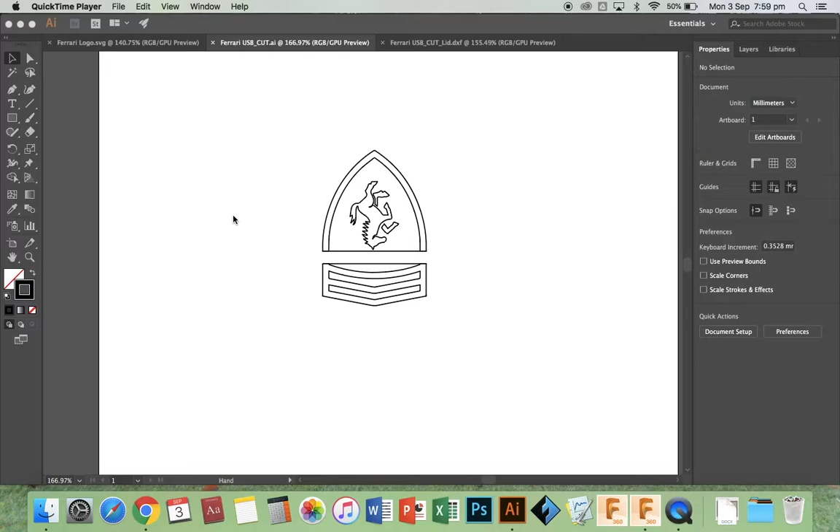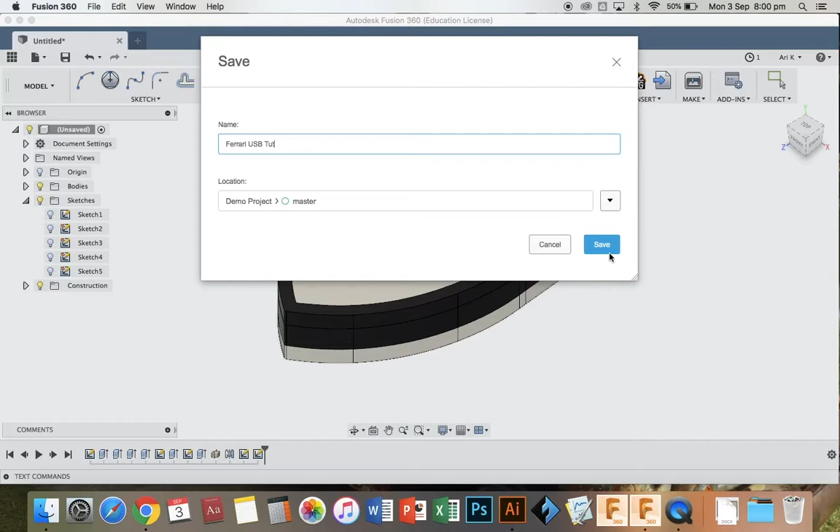So now that we've set up the laser cut files, we'll go back to Fusion 360, back to the Ferrari USB, and it would probably be a good idea to save by this point. We should actually save along the way. So do that. We'll just call this Ferrari USB Tut. You can call it whatever you want, but that's what we'll call it for this part, and that will save it to the demo projects, which you can access again later. So press save.

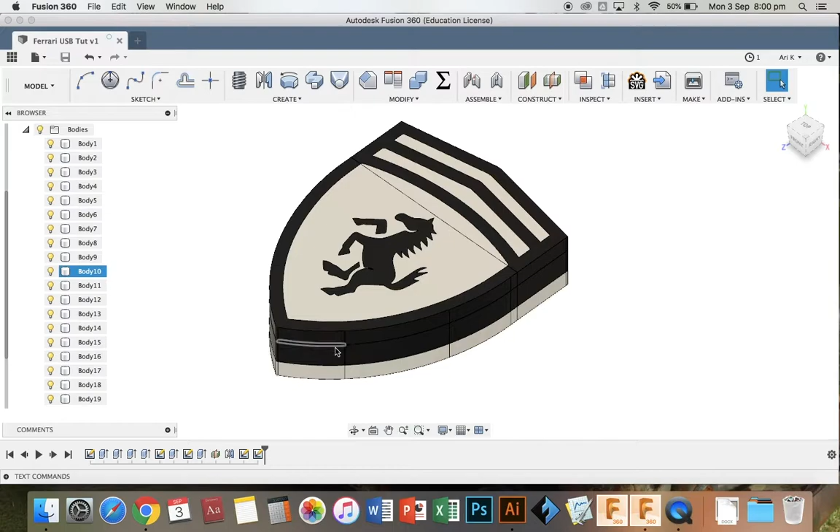Alright, so now that that's saved, we can tell because it has a name up the top here. What we want to do now is 3D print the files. So we'll go to bodies, and this is a bit hard because they all look the same. But we know it's the central body, so we can go select, and it'll actually underline which body it is. So then we can select body 10, which it is. We can see by the blue outline.

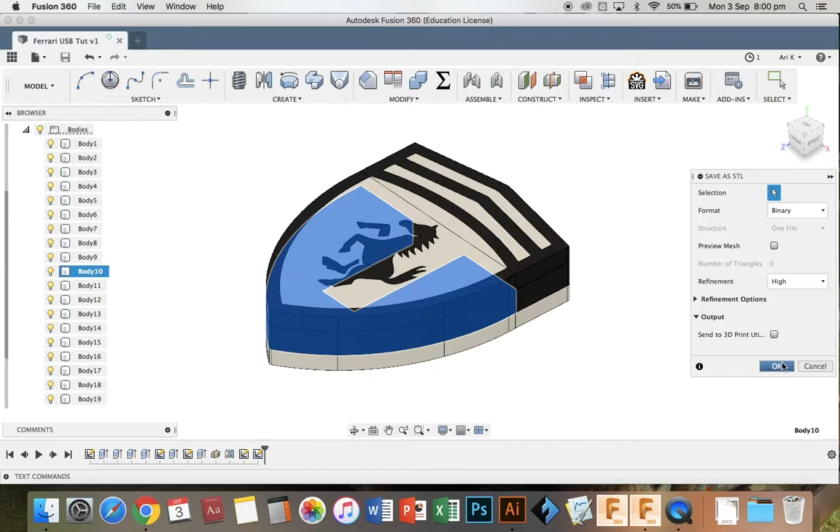And then we can go 2-finger right click. We'll save it as an STL. And we'll change the refinement to high. There's multiple settings; we'll make sure it's high. And we'll just go OK. And we'll save this as Ferrari USB underscore body underscore print. So now we just know that we can print that one. So we'll save it to our Ferrari USB folder again and press save.

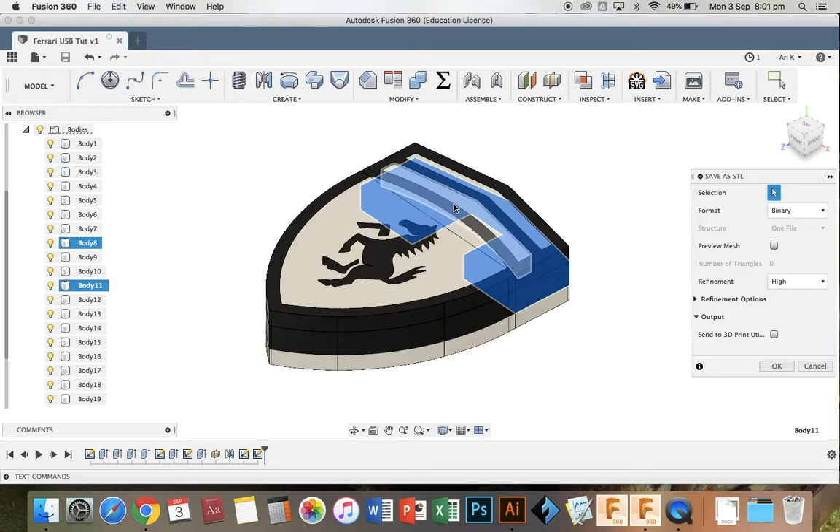And we'll do the same thing for the lid, so we know it's the central part, and that happens to be the body underneath it. So we can click that, 2-finger right click, save as STL, refinement high, OK, Ferrari USB underscore lid underscore print. And we'll just save that again in the Ferrari USB folder.

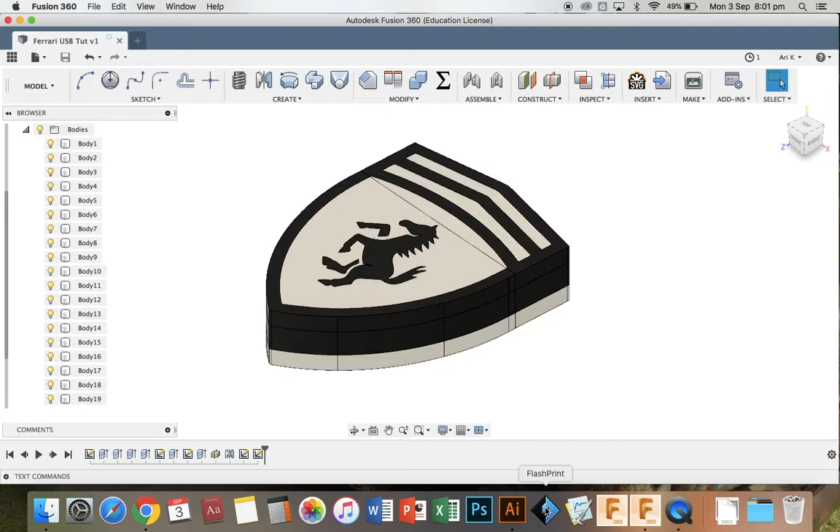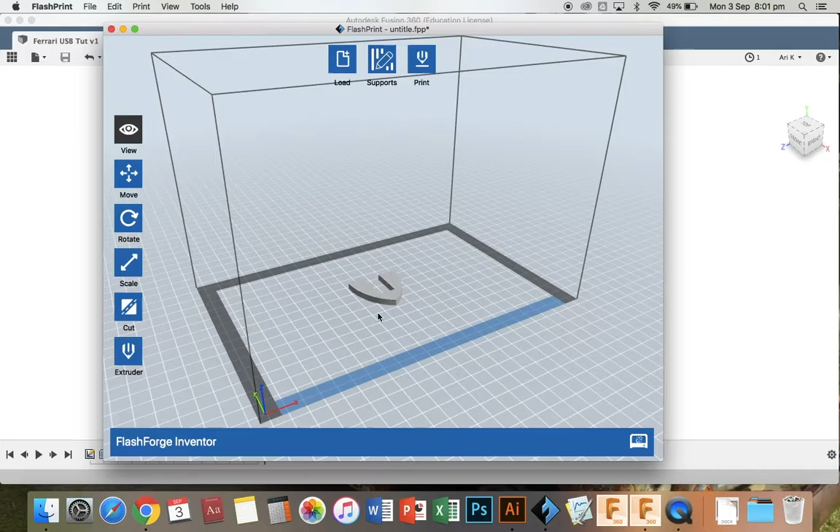Alright, so once we've done that, we can then open FlashPrint. This is the printing slicer for the FlashForge Inventors. That's in the bottom. So then we can go load and then STL files. So we'll go Ferrari USB body. We'll open that. So that will import it, and it'll be on the bed. And then we want to print the lid as well. So we'll load lid, open.

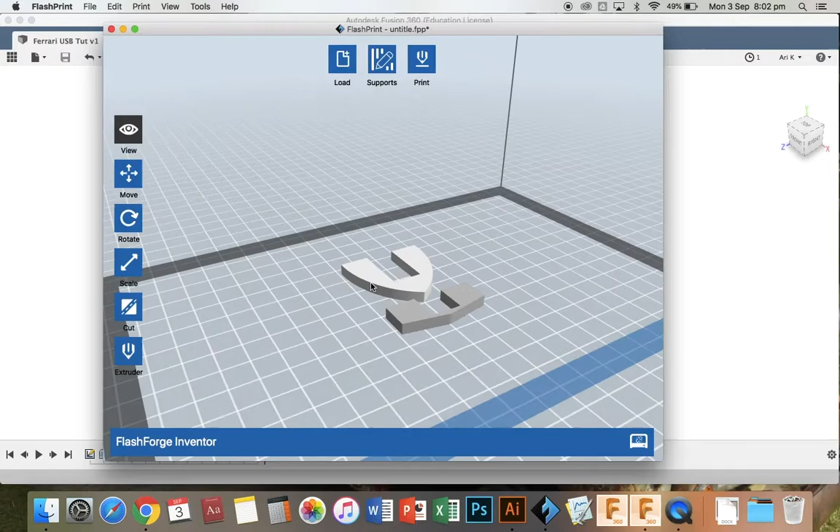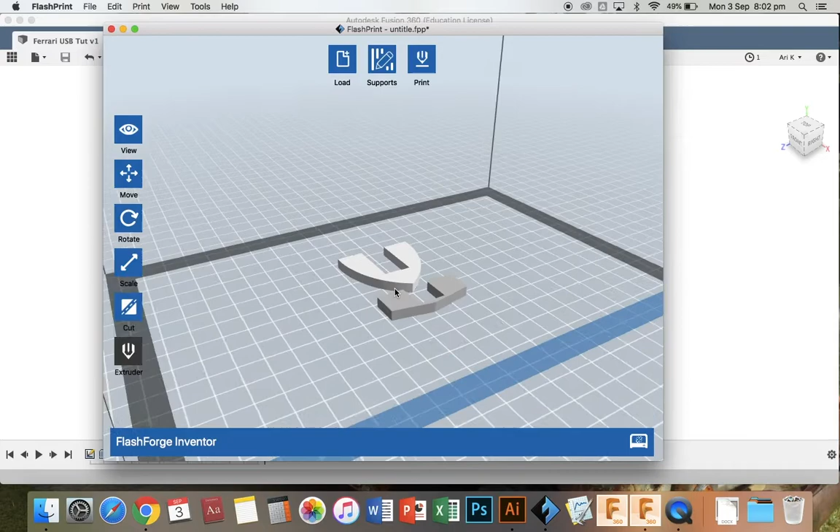See how they're kind of colliding and we have to move them. The printer won't like that. So if we go up the top and we go edit, auto layout, it will automatically arrange the prints so the printer can print them nicely. Depending on which color you want, the Inventors actually have 2 extruders. So you can change the extruder heads by double right clicking on this tab and then selecting your bodies. We'll leave it at the right extruder for now. There's no need for supports on this as there's no overhangs. So now we can go straight to print.

These are some custom settings, but we'll change the quality to high, which just gives it a pretty good finish. And we'll actually put a raft on this just to make sure that the quality of the print on the first few layers is good. So we'll enable raft, change the extruder to right, so we only print with the one color filament, and we'll change the space to model Z parameter from 0.25 to 0.4, which is what I have. So we'll go 0.4, and I accidentally pressed enter, so just cancel that.

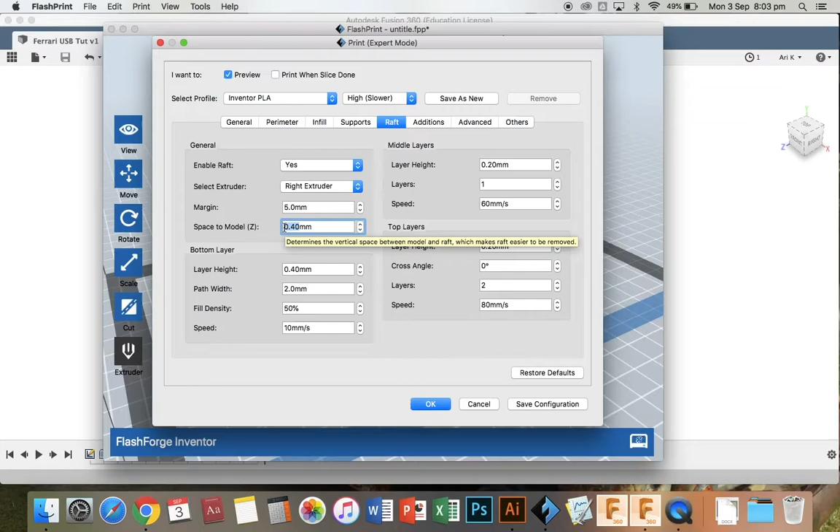What this does is it just lifts the print off the raft, which makes it easier to remove, if you read the little heading when you hover over it. Determines the vertical space between the model and the raft, which makes the raft easier to be removed, which is a good thing.

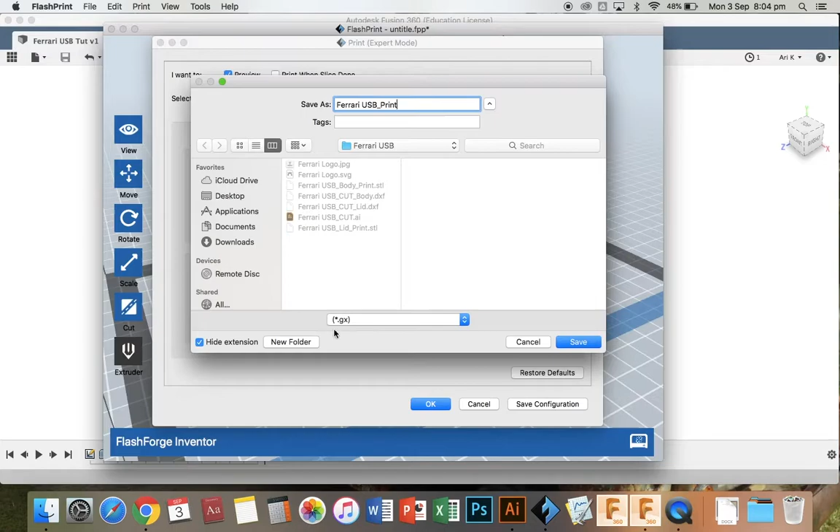So we're happy with all that, and then we'll go OK, and we will save it as Ferrari USB print, and it's going to be a GX file, and we'll save it to our Ferrari USB folder. We'll go save, it loads up, and it's a quick print, 35 minutes. If we go to the left and drag down this little slider column, it will show us all the layers of the print that the printer will do. So then we can just hook up to the 3D printer and press print.